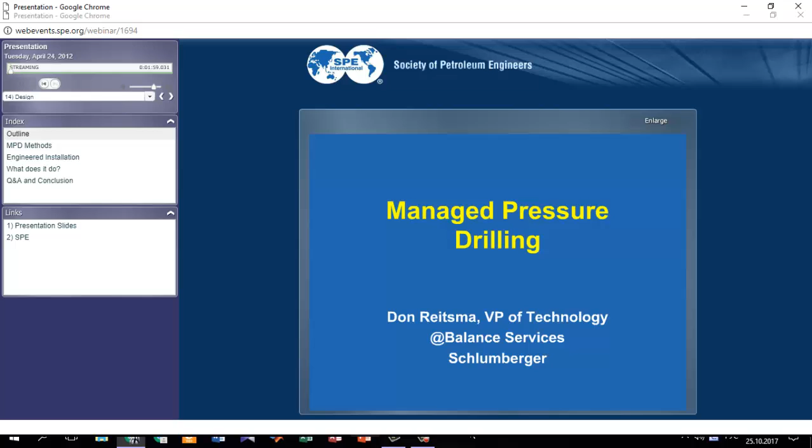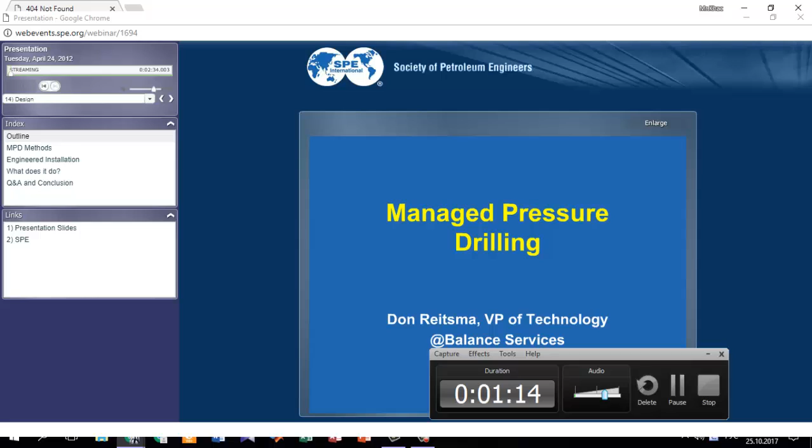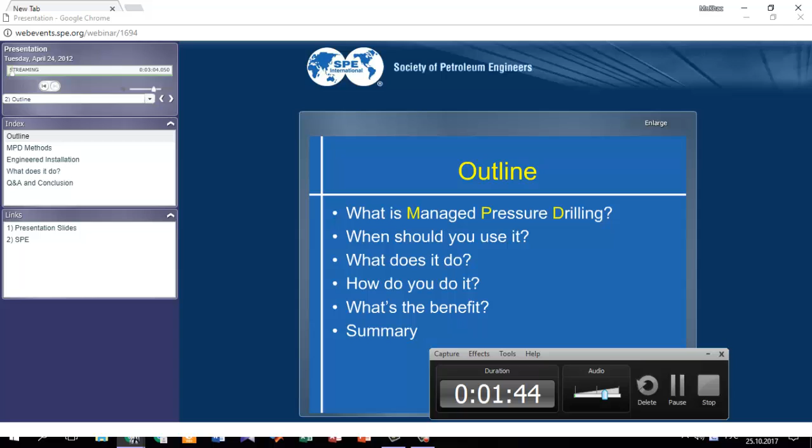Mr. Reitsma holds numerous patents, and has written and co-written various IADC articles on the subject of managed pressure drilling. So I'm just going to start with the definition. This definition was developed some years ago after several years of actual discussion about it. But what we came up with was to say...

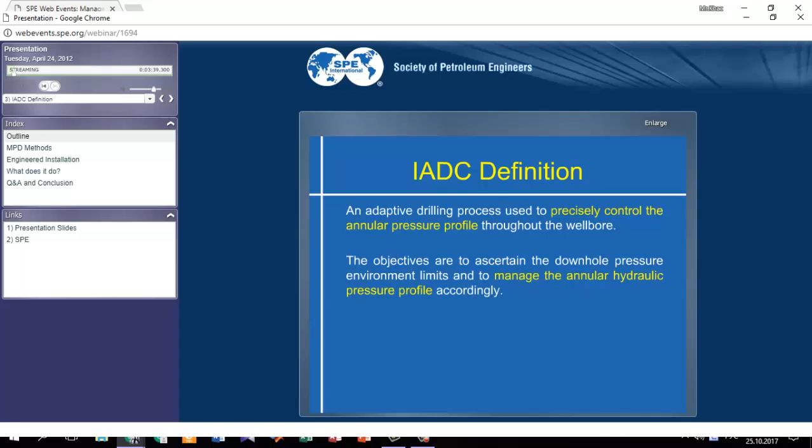Also, what's the benefit? You know, what we want to do with MPD is avoid a continuous influx. It's really an overbalanced drilling technique. And the reason we came up with that was because underbalanced drilling, or UBD, was already out there, and there were really, to be honest, some people that just didn't want underbalanced drilling on their rigs or in their region. And we wanted to make the distinction that managed pressure drilling wasn't there to have this continuous influx throughout the well, you know, like underbalanced drilling.

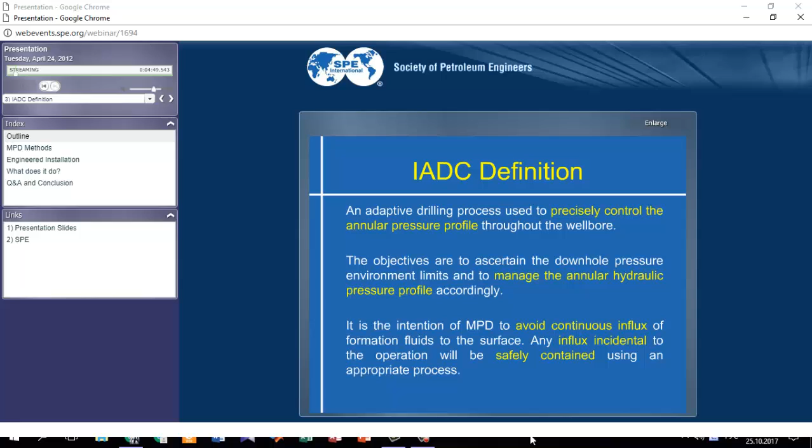What we want to do with MPD is avoid a continuous influx—it's really an overbalanced drilling technique. The reason we came up with that was because underbalanced drilling was already out there, and some people just didn't want underbalanced drilling on their rigs because we run into problems such as losses. We wanted to make the distinction that managed pressure drilling wasn't there to have this continuous influx like underbalanced drilling.

So if there is an influx, it could be planned if you're trying to fingerprint your well. You may be able to just change the pressure, figure out what these environmental limits are, but you're going to contain it—we want to make sure we're getting to target. It says economically unattainable prospects, but really what we're looking at is efficiency. We may be able to get to TD with conventional drilling, however adding MPD techniques may make it more economic and easier.

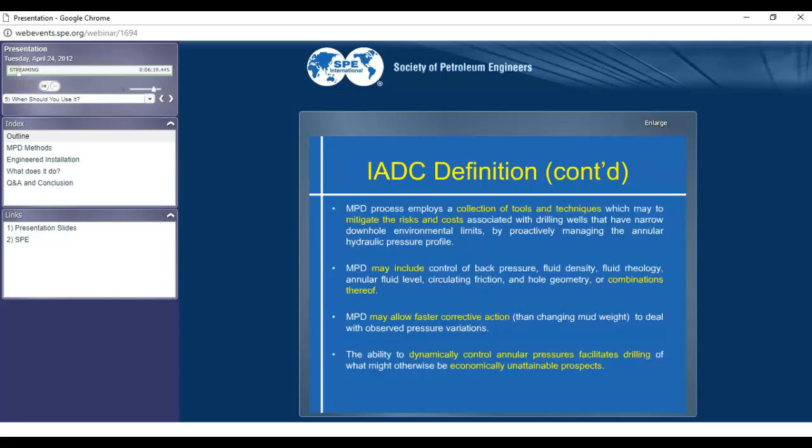So when should we use it? It's really when conventional drilling is not getting us to where we want to be—are we going over AFE because of drilling problems, losses, kicks, a lot of non-productive time? We just want to come up with a tool that we can exploit the asset at the lowest risked cost.

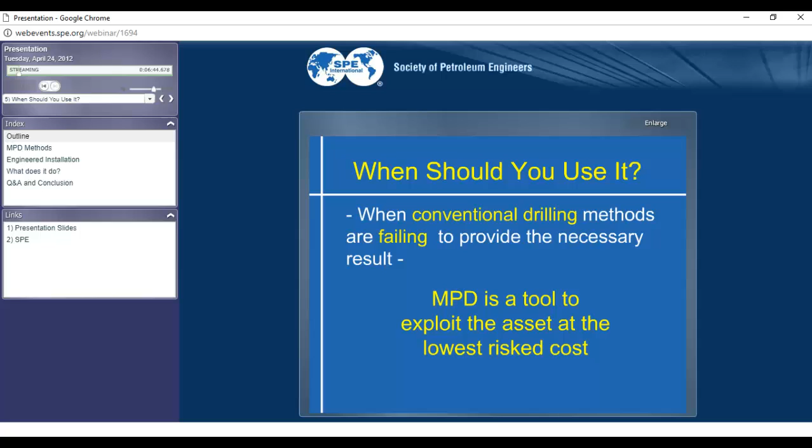So what are these problems that we're going to run into, this NPT? As I mentioned, kicks, losses, borehole instability, and that's going to be characterized by having to back ream quite a lot, essentially fighting your way to bottom, maybe cuttings loading and collapsing, that sort of thing.

Breathing and ballooning, which we see in high HPHT wells. Nuisance gas, which is a little bit different and might suggest more of an underbalanced drilling technique. And stuck pipe, which could be borehole instability or differential sticking, and then low rate of penetration, which can be helped in some cases with managed pressure drilling.

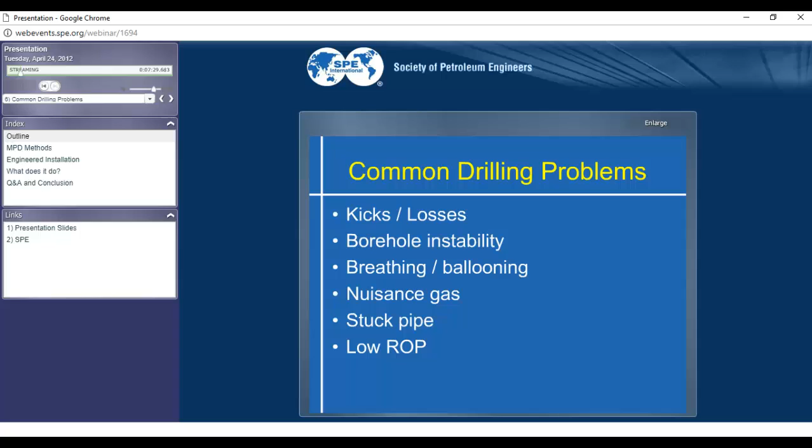So how does it happen? First of all, drilling through depleted reservoirs typically causes borehole instability and a reduced fracture gradient, so you end up with a smaller pressure window—I'll get into that a bit more. Drilling into fractured reservoirs, if you've ever drilled into a karstified carbonate system or a massive vugular system with fractures, you get total losses and then it turns around and kicks you.

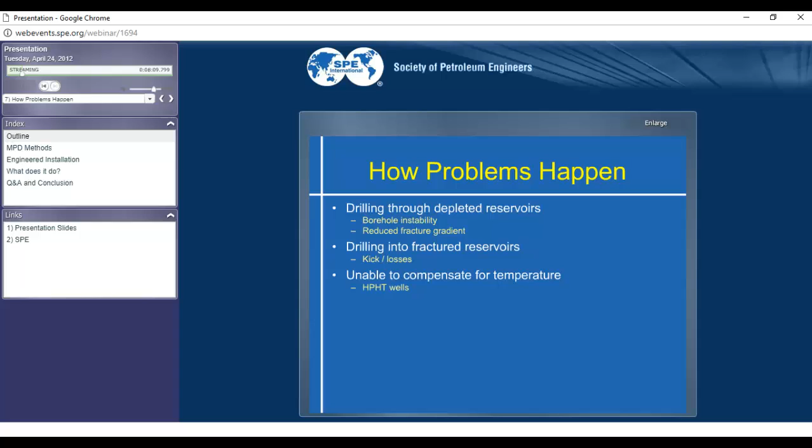This is another one we've always had a problem with—HPHT wells, and how to compensate for the temperature changes in the well, particularly when we're tripping, and how those mud properties have an opportunity to change because of the increase and decrease in temperature in a particular part of the borehole. So how are we going to manage that?

And surge swab—a lot of re-entry drilling is done with very high friction factors in the well, and when you start moving that drill pipe, of course, you'll get increased pressure from surge swab.

Exploration wells—do you really know what you're drilling into? Basin models can have greater than 5 pounds per gallon error, for example. We've got one where we just drilled in and it was over 2 pounds per gallon off, with total losses, and we had to correct for that.

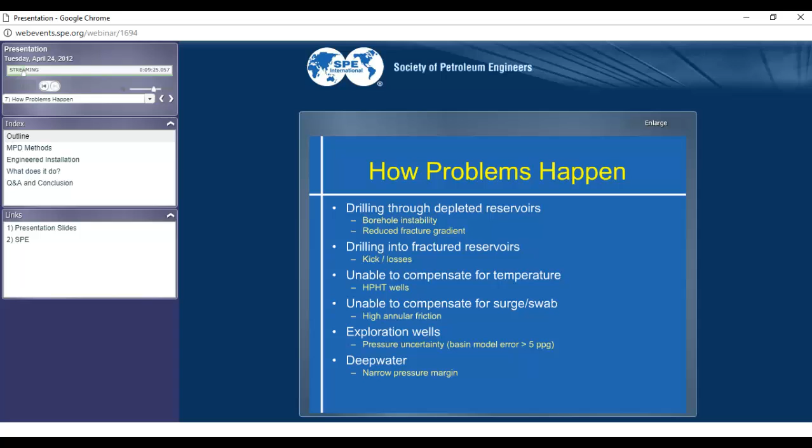And deep water, narrow pressure margins, if you've seen that. That's something that's just beginning to be seriously looked at in terms of providing solutions, and it's going to be very important to ensure we obtain those reserves.

So these problems are costly. Definitely, if you've gone twice over AFE in some cases—your expendable cost is going to be a lower cost type of thing, your spread cost is going to be a higher price, but the greatest cost is that lost objective that the oil company was trying to obtain. If you lose those resources, you just don't have that money anymore. So what we really want is the lowest dollar for recoverable barrel of oil equivalent, and we're going to reduce those dollars by controlling the drilling costs and increase those dollars by being able to produce those reserves. And that's very real.

What I'm talking about here is really drilling the undrillable wells that we can't get at with conventional drilling.

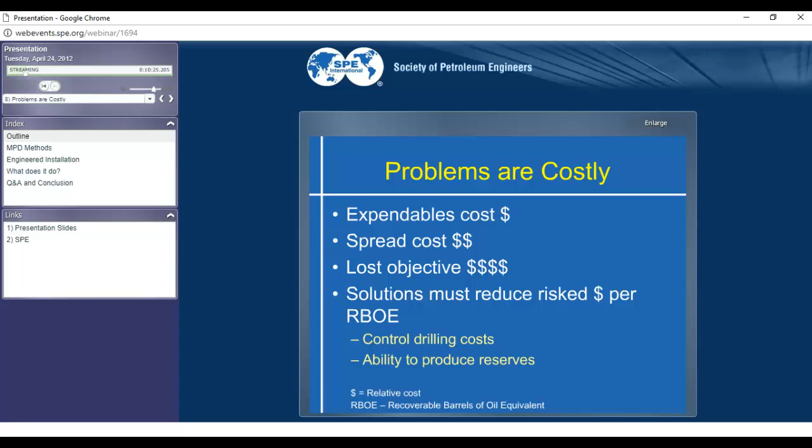So what I'm showing you in this diagram is this red line of pore pressure, or borehole stability, and this other red line being the yield or fracture pressure. This is the typical narrow window we run into, and what happens is when the drilling rig turns their pumps on, the frictional pressure increases and we perhaps exceed the yield pressure, and we start getting losses. People will look at this and say, well, we're getting losses, let's pump LCM, let's pump borehole strengthening materials, and those may help to a degree, they may even solve the problem.

But what if they don't? What's the next tool in the toolbox that we're looking at here? Let's try and maybe control this pressure a little bit better.

When pumps are off, for example, we lose that frictional pressure, and because maybe we've dropped the mud weight a little bit to try and cure our losses, as another method of doing that, we may find ourselves below pore pressure. Maybe not a lot below pore pressure, maybe just a little bit of gas coming in, but enough to make it somewhat of a kick, perhaps, or nuisance gas, and it's not something that's controllable.

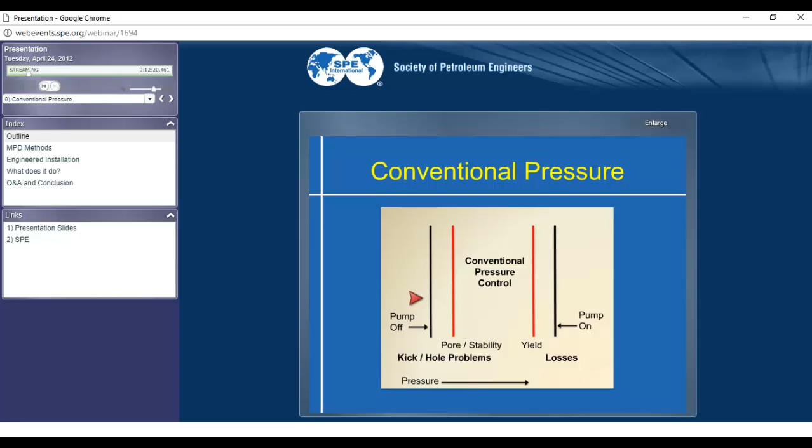So with managed pressure drilling, what we want to do is really control that, work within the environmental limits. Perhaps we've established what those are by a leak-off test and what we call fingerprinting, by maybe reducing the pressure and taking a slight influx to find out where our pore pressure is. And by some way of manipulating the pressure, we are going to maintain the pumps on and pumps off pressure within this window.

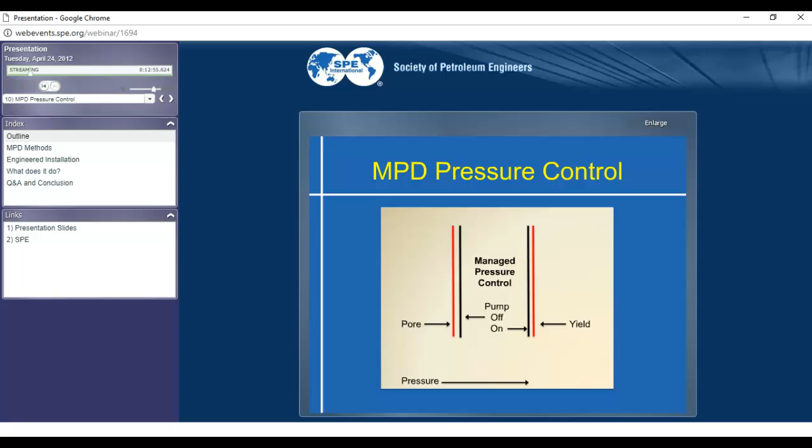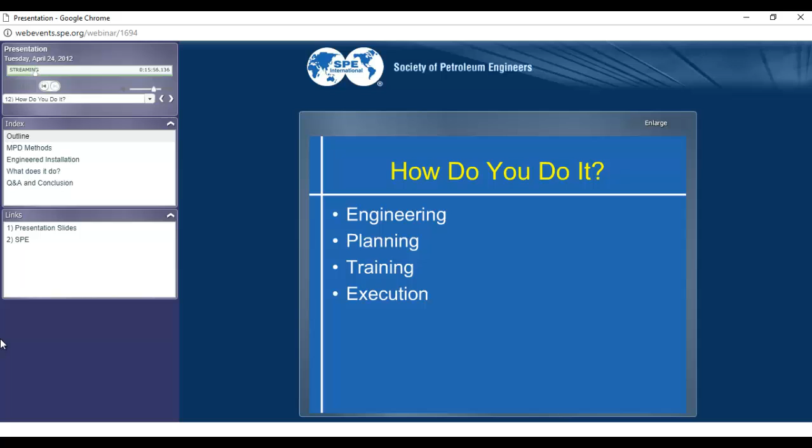So in engineering, let's take a look. Let's just see if managed pressure drilling is a tool that can be used to drill that well better.

We're going to have the hydraulics program, so we're going to plan on what mud weight we're going to use, what pressures we're going to use, how that's going to affect the pressures all along the annular pressure, the pressure profile, which is very important, and I'll give you some examples of that.

And then tripping is probably the most important thing we need to look at. Drilling is essentially easy in terms of maintaining pressure and having pumps on and pumps off. But how do we get that drill string out of the hole? Are we going to pump pills or use a different weight of mud? How fast are we going to pull? Are we going to pump out of the hole, or are we going to go on elevators?

Obviously, if we can get out on elevators along a hole section, it's going to be much faster, much more efficient. But it may be necessary to pump out of the hole. You just have to run these hydraulics to see really what you're going to do.

And then running casing and liners, you end up with higher surge swab pressures, that sort of thing. So how are you going to get the casing in the hole? And finally, how are you going to cement this well? Don't start pumping cement and then get total losses, for example. So really planning from drilling out of the shoe to landing and cementing, and casing or your liner, if that's the case. So we really need to look at the whole thing.

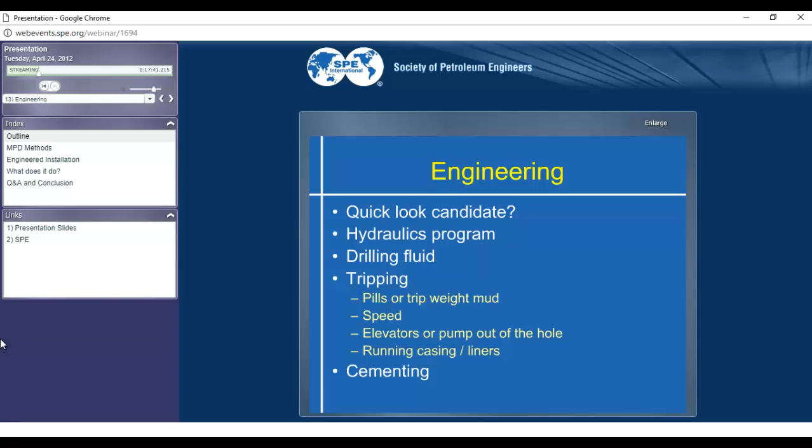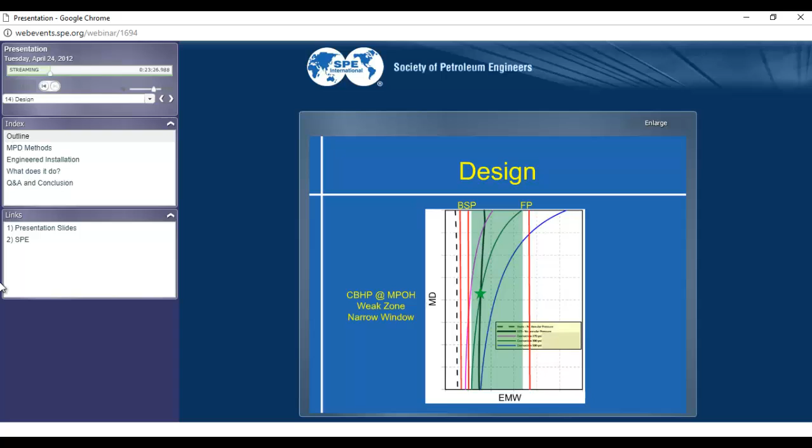So that's where we have to do the work, but we also have to do a lot of work with the planning, with the site survey. It depends on the equipment, the location, the stack height, because you need a rotating control head if you're using back pressure, for example. These things all need to be considered, and it depends on the type of installation. But really, you want to do a site survey first, where you're going to put things, how you're going to hook them up. The HAZID HAZOP—it's a new technique.

There are new hazards, new methods that have to be done. It should be included into the drill-the-well-on-paper program, that sort of thing. How are you going to manage well control now? How are you going to do kick detection? Those are all very important considerations as well, and how long they take really depends on your HSE program, the complexity of the well, the experience of the personnel, that sort of thing.

Some of the more detailed cases, you can do several HAZOP reviews as well, so you'll figure out the best way to deliver the product. And of course, mobilization—how long does it take for equipment to get to New Zealand, for example?

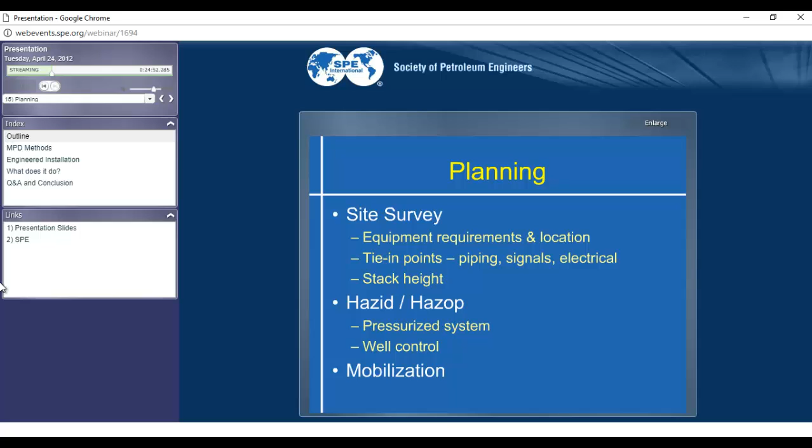Training, again, very important. Office people, basics of MPD at a minimum. If the engineers are designing it, they have to know what they're talking about. Rig operations really have to know what's going on—what if that rotating head begins to leak?

What am I going to do? What kind of pressures are we looking at? How am I going to communicate with the MPD provider? That sort of thing. And for those not directly involved but who like to listen to the morning calls, a general understanding is probably fine—they know what you're talking about.

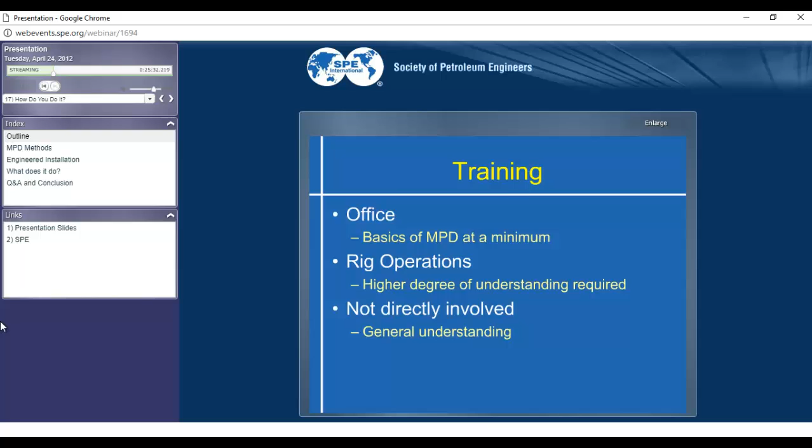So how do we do all this? I've given you a couple of clues, maybe with back pressure control, that sort of thing. But it's really going to come down to where you're going to do it. There are four main ways: annular friction, surface pressure, density control, and what we call delta energy, and I'll talk about that. Now over on the left here, where I say annular friction, that's really the equivalent circulating density control only—you only have control over the friction in the well by using this technique.

It's a different method, but it will only give you control over the friction pressure in the well. Geometry, you're going to design to reduce your friction as much as you can—with the casing, drill string, hole openers, a lot of that being done.

Pump rate, you're going to consider it, but I wouldn't recommend starting to change pump rate because cuttings are loading. You want to reduce ECD—you're going to just drill yourself into a problem.

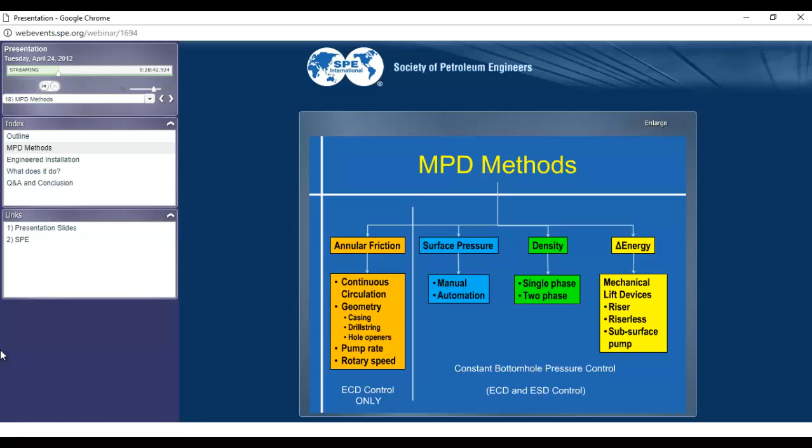Subsurface pumps are coming in, and that was presented at the dual gradient seminar we had in Milan a few weeks ago, which was very well attended with a lot of good information there. So if you can get more information on that, it'd be very helpful—I can point you in that direction too.

So I'm just going to talk about surface pressure. Really, we don't have the time to go into every method we can think of for managed pressure drilling, and I think the number of methods being developed is increasing by the day almost—it's really just coming up with more creative ways to get our wells drilled cheaper.

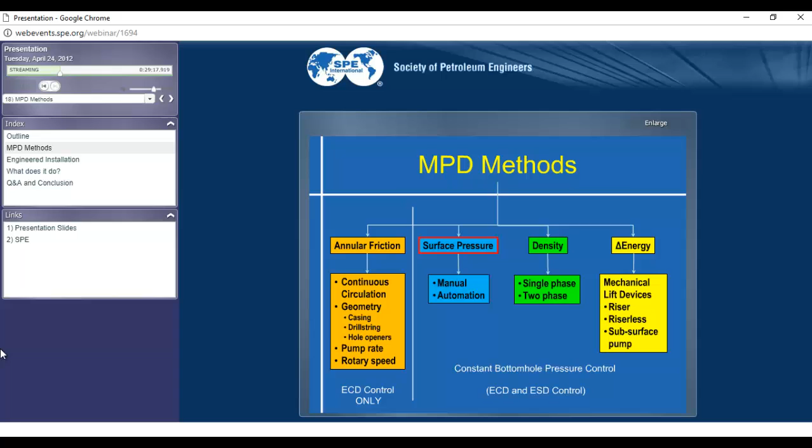But what we're getting developed is this IADC selection guide. This is only in draft form, and we're still working on it a little bit. What we're going to be interested in here is what well location—we're really just trying to provide a simple guide to start you off with, and some of the tools you may consider for managed pressure drilling.

And I think today what we've got is too many tools being selected by this guide. But in any case, we're still working on it a little bit. Hopefully in a few minutes you can get an idea of whether it's going to work for you and what could work for you. So we're going to look at what your well location looks like, the type of rig.

The drilling fluids in use, what the pressure profile is. Really, what are your goals or concerns—are there losses, kicks, that sort of thing. And we've got just an example of the narrow pore pressure here, frac gradient margin.

And then what it comes up with—I won't go through all the colors and everything—is the different techniques that are available. And if you just briefly look down this list, you can see quite a number of different techniques that can be used, and they come under the managed pressure drilling umbrella.

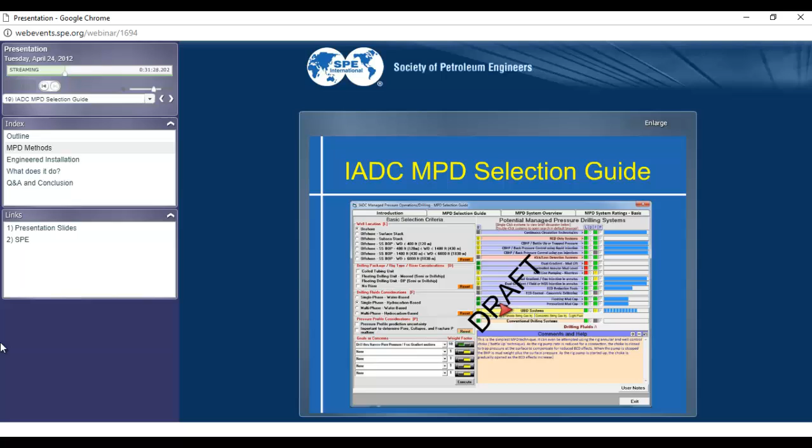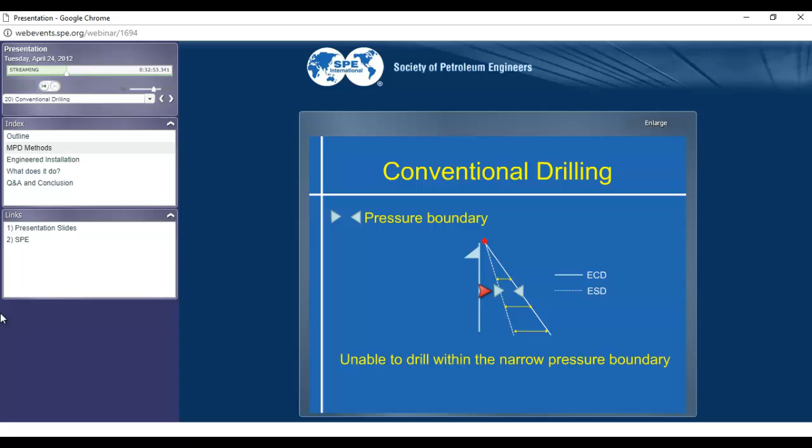If I've arbitrarily put in the pressure boundary I need to get through, this narrow pore pressure frac gradient boundary, for example, or borehole stability boundary, which may be because I need to drill through a depleted reservoir to get to a deeper horizon, I can't do it because I'm outside that boundary now. So I need a different way of getting through, and this is becoming more and more common. This is a real brownfield type application where we're in an existing field drilling deeper to a new target.

Continuous circulation, just one slide briefly on this. How I'm saying we've got ECD control is on the left here. What we've done is maybe reduced the mud weight a little bit, and we'd be taking a kick, or we're keeping the same mud weight. But this line here, our dynamic pressure with pumps on, is always going to be designed to drill through that window. So that's no problem, we've got that.

Now, on the right here, what we have to consider is that once we're at TD, and let's say the bit is right there, we've got circulation occurring above the bit, obviously. But below the bit, we've got the static gradient of that mud, so we're parallel to this dotted line. We have to make sure that when we're pulling out of the hole, we still maintain this pressure in this window. We couldn't pull all the way out of the hole without doing anything, because we'd lose all our friction and be back to this point, taking a kick.

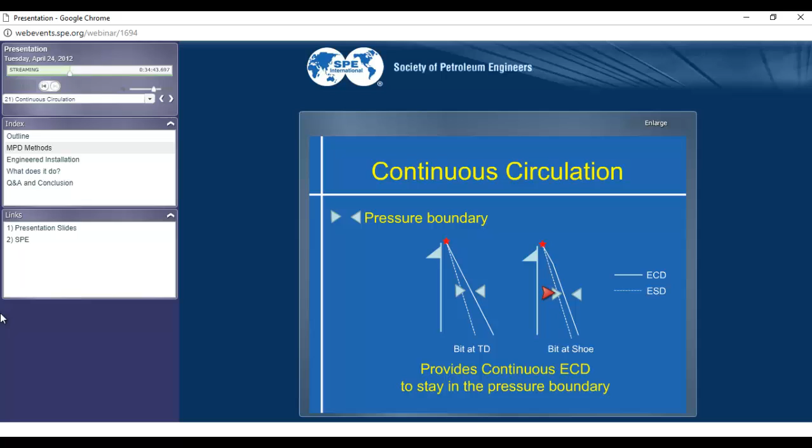So what we're going to plan on is maybe pumping a pill to impart more pressure to increase the static density without circulation. So that's the engineering plan, but this is just to show you what you'd have to consider with continuous circulation, because you only have circulation to work with and the control of the friction.

So going on to back pressure control, it's really the most common method used today, onshore and offshore. It's scalable. People are using it in manual control, as a backup in case they need it, or it's planned, so they're going to use it, that sort of thing. There's a real plethora of ways to apply back pressure in order to do that, and I'll talk about that a little bit.

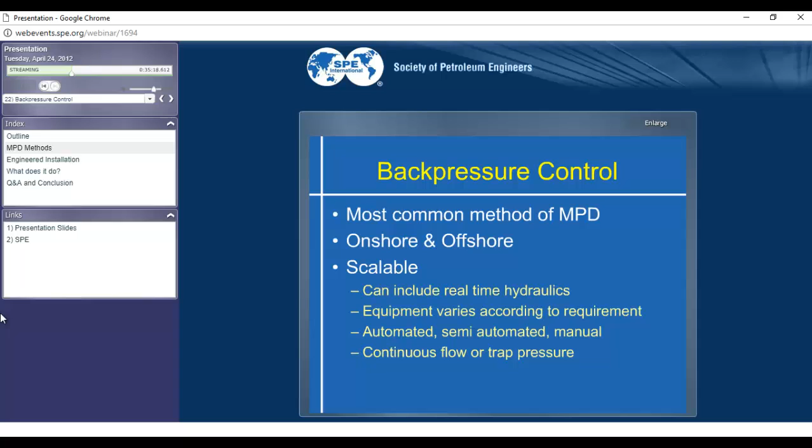But what does back pressure control do? Again, trying to build on from those cartoons I showed you earlier. If we wanted to maintain constant bottom hole pressure at the total depth of the well, and we planned for a static density with back pressure of some value, which is going to be above the continuous pressure when we're pumping, continuous flow, we can find that we can get through that pressure window in that way. So that's another way of getting us to TD and staying in the pressure boundary.

And rather than calling this constant bottom hole pressure, what I think we should really call it is inverted pressure drilling, because instead of having constant bottom hole pressure at the surface with conventional drilling, I've now just turned it upside down, and I've got constant bottom hole pressure at TD. And why does that work? Mainly because I have less friction in the open hole section, and I'm compensating for all that friction from the shoe right to surface.

So a little bit of a math exercise there, but it works very well.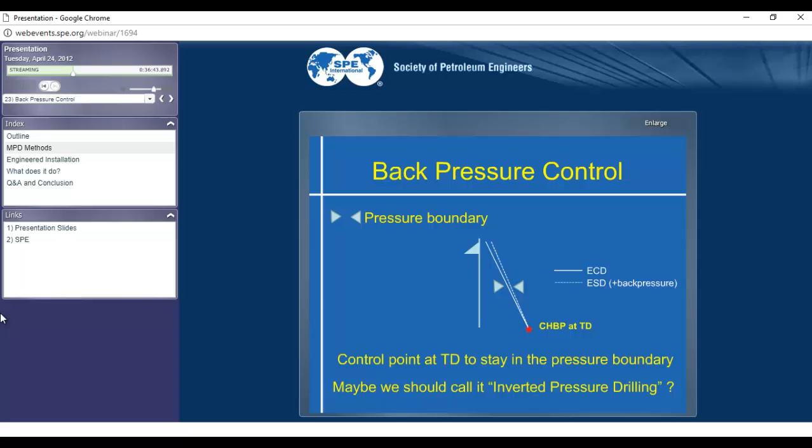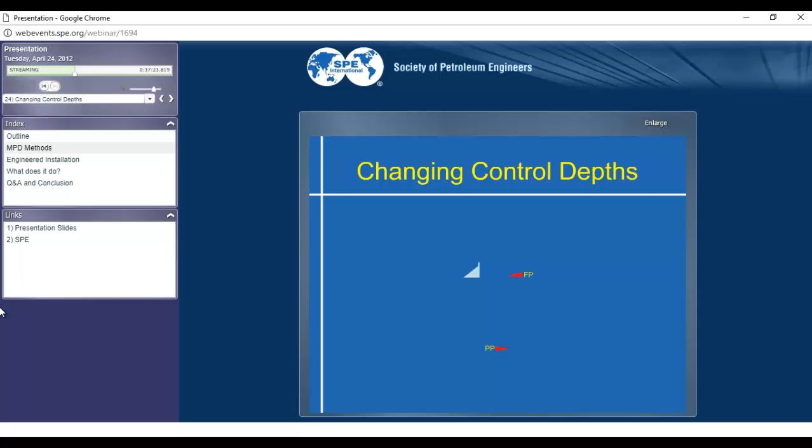So I've managed to get my shoe down, and maybe my fracture pressure, my weakest point, is at the shoe. I hope not, but it ends up that maybe it is. Maybe I've landed the shoe too high, and it's not like that hasn't happened before. So, gosh, now I've landed the shoe too high. I've got a weak shoe. What am I going to do here?

So I'm going to hold constant bottom hole pressure at the shoe, and I'm going to drill down. That little red star here shows where I'm going to hold this pressure constant. Here's my static density and my equivalent circulating density. I turn the pumps on, and when I turn the pumps off, I'm holding pressure constant here. What I'm going to do is a little exercise: wherever my bit is at, that's where I want to hold the pressure constant. Let's see if that actually works. Imagine that red star being the bit.

So I'm going to drill ahead, and I'm still okay. I haven't actually drilled yet. This is my hole here, and I'm not down to pore pressure yet. So I'm okay so far. I'm staying away from fracture pressure. I've got a pretty big window there.

I'm okay, I'm going to just keep drilling down, and now I'm at the midpoint of the open hole, and things are going really good, and I'm getting closer to my fracture pressure now with my back pressure. So I'm just going to keep drilling ahead.

And I've now gotten to TD, and it looks like I could be hitting my fracture pressure with my back pressure. If you remember from the hydraulic model I showed you, with constant bottom hole pressure at TD, where you've got this curve—I'm not showing you the curved line—the pressure is going to increase at surface. Why? Because we're compensating for the friction in the open hole in order to keep these values constant. So this pressure is going to go up as I'm doing that.

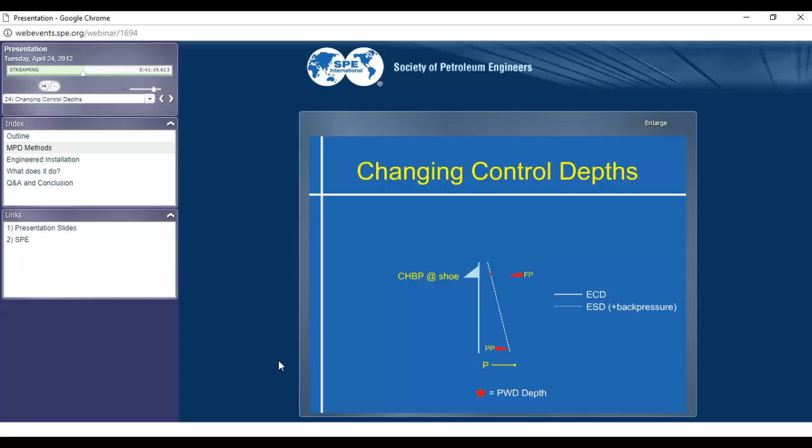So what I end up with is a potential pressure window that I can drill in with surface pressure. These dotted lines here are going to be my back pressure, when the pumps are off. And this white line is what the pressure profile looks like when the pumps are on. So I can manipulate the pressure anywhere in this window by changing the back pressure, and I just have to figure out where I want to do that.

So do I want to move the line here, or here? This line is somewhere in between this line and this line, to stay within that window. So this is the potential pressure window that I have, and I'm just going to figure out the best place to be in it. Really, I want to stay away from fracture pressure and pore pressure or borehole stability problems, and manipulate that pressure.

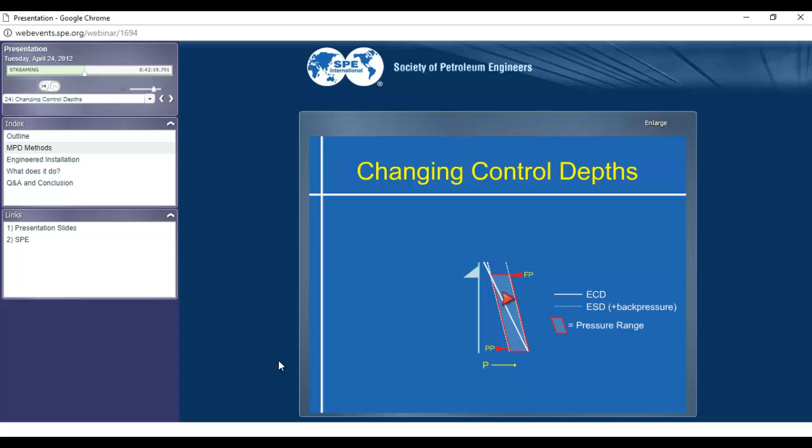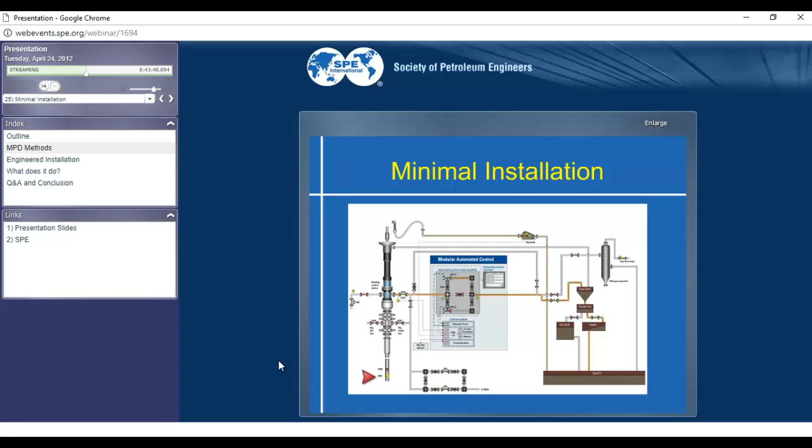So essentially, that's what we're looking at there. This is an example of a simple installation where we just have a choke manifold, and you can see some control lines here and a hydraulic line, and we've got this connected to a control system. We're using 3-inch hydraulically actuated chokes, which is kind of the stalwart of back pressure control.

This is where these nuisance gas applications come in, and essentially they're a low volume, high pressure situation where you'll temporarily go to an underbalanced situation, but you'll essentially bleed that gas off in a well control event type of manner, and then continue to drill ahead without having to weight up, because you'll deplete the reservoir.

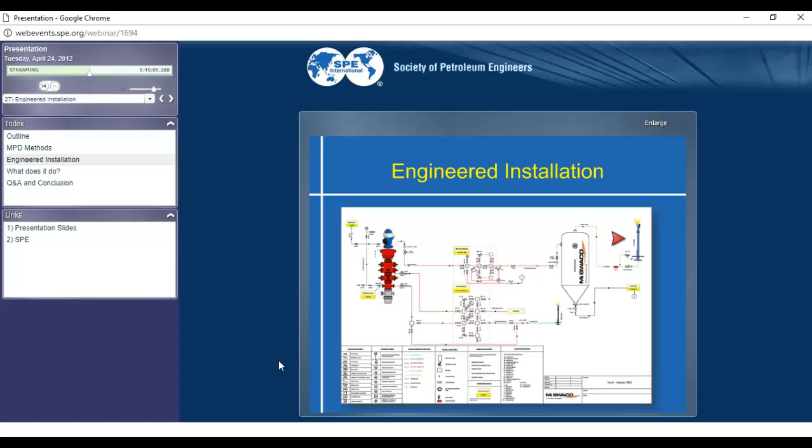So this is another type of manifold setup using auto chokes here, and then a third choke's been put on the E-choke. So these auto chokes might be a lower pressure control, and the E-choke might be a higher pressure control. So there are numerous ways of designing these systems.

A full-scale installation has a lot more parts and pieces added on, but essentially, if a back pressure pump is being used, it may aid in more precisely controlling the pressure, but it adds to the piping, and you need strainers, that sort of thing.

As well, if you're not using a kick detection system already, add in a Coriolis flow meter, which then gives you a really high fidelity kick detection method, probably down around 15 gallons a minute in order to detect, depending on the flow rate—it's a percentage of the flow that the users are going to be able to pick up. So it's more piping and more equipment, so obviously more complexity involved.

In a lot of applications, this is the standard method of doing managed pressure drilling, but for some of the North America land applications, where it's more of a contingency or a known requirement, and you can trap pressure, for example, you just wouldn't go ahead and use that.

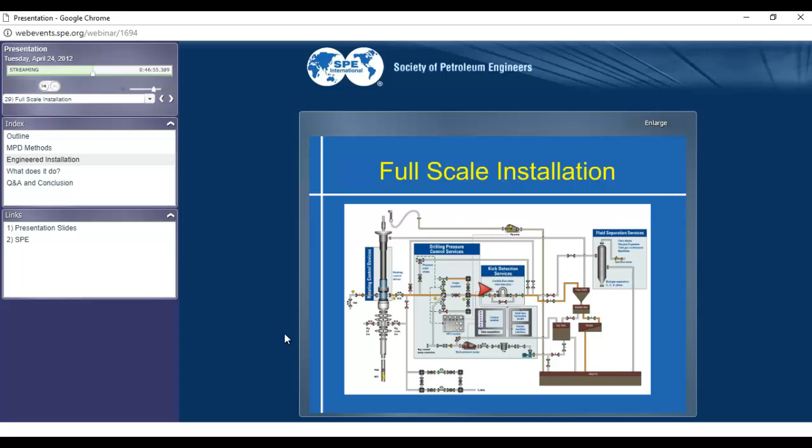This is another offshore situation. You see the Coriolis flow meter here, and in this application as well, there are two back pressure pumps, and the client just felt that they wanted the contingency of a backup pump, and that's fine. This is what you're going to see when you go through your HAZOP, for example.

Here's a land application over here where we've got twin hydraulic power units. This is a modular system. That's the PLC panel, that's the pump, that's the choke manifold. On the integrated system, it's got the PLC, the hydraulic power unit, and the choke manifold all on the one skid.

So different applications, different methods depending on that application. I'm just going to roll into a little more detail on choke control automation and then wrap things up.

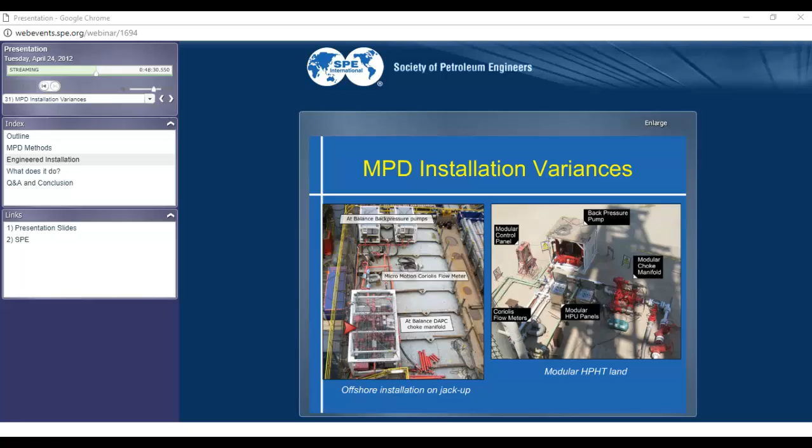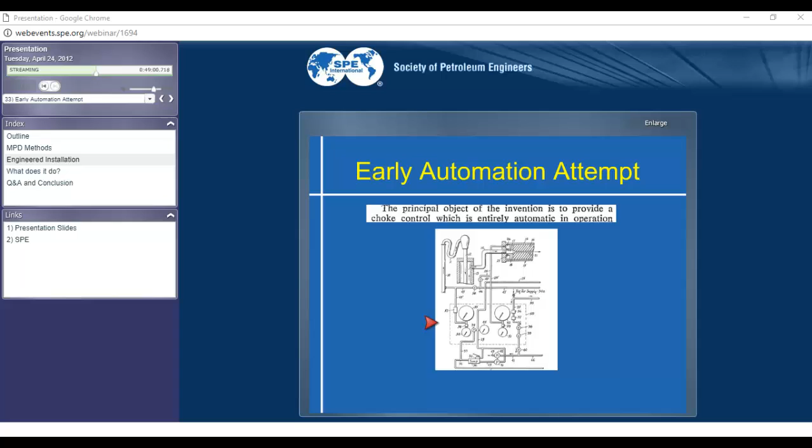Here's an early automation attempt at controlling a choke, I think this goes back to 1967. He wanted an entirely automatic operation of that choke, and here's how you're going to do it. Don't ask me to explain it, I'd have to go through it. But it looks a bit complicated to me, and although that was the state of the art at the time, it just didn't work, and was likely unstable, unreliable, couldn't be operated. People said, I can do it by hand better, and that's what they did.

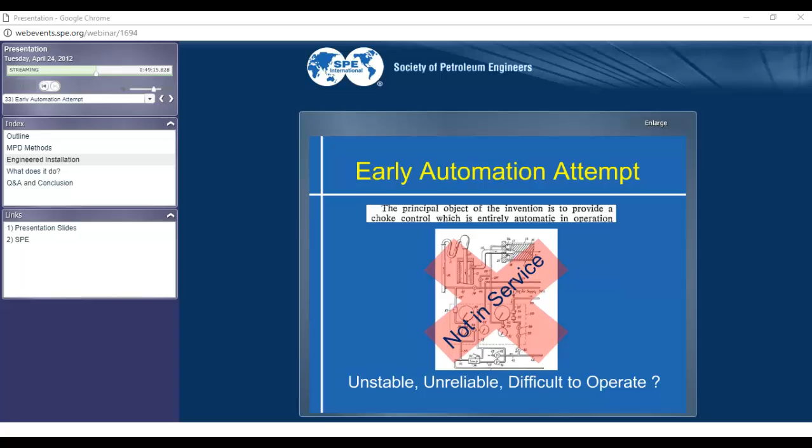But the reason they wanted that automation was because they want it repeatable. What we have today is what are called PI control blocks, or proportional integral blocks, a typical control system method. Some manual tuning is required to get the right numbers into this PI control block. What happens then, though, is if the compressibility of the well changes, you need to go back to square one and do your manual tuning again.

These aren't the most stable systems in the world, so rapid large changes in pump rate or pressure requirements can make the system unstable. So typically we're very controlled in how things are done on the rig. At times, though, things happen without planning - pumps stop, power failures, that sort of thing. So the system has to compensate for that, and sometimes what they do is they go back to manual control, and we're trying to get away from that.

The chokes have this sweet spot of 20 to 80%, or 30 to 70%, where they operate very well. If you move the choke, you get a pressure response. But below those numbers or above those numbers, if you move the choke, you may not get a lot of pressure response, so you have to move it a lot, and that makes it really difficult to control. As luck would have it, a lot of jobs we're on were below the 30% range, so it's difficult to control these chokes manually.

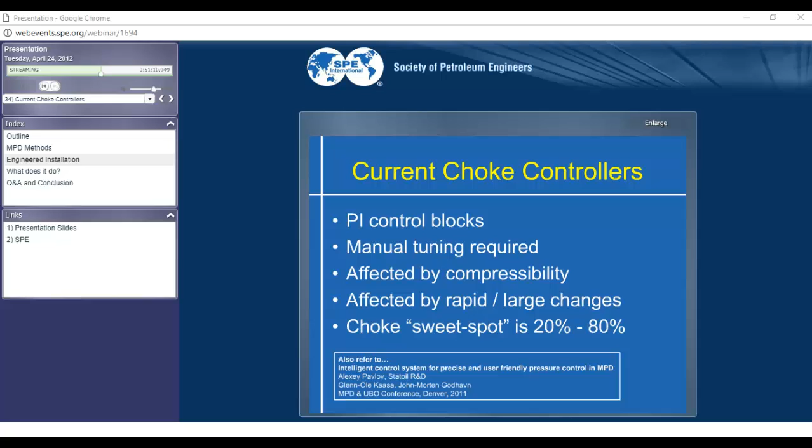So with a new choke controller, we want it to be compatible, have no tuning requirements, so people don't have to know how to work it. They just have to know how to put a pressure signal to it, either manually or whatever, and the choke will do what it wants. So it has to operate across the full range of the choke. Why? Because we want it stable, and stable because we don't know what's going to happen, whether it's low flow or people changing pump rates or different fluids going through the choke or compressibility changes.

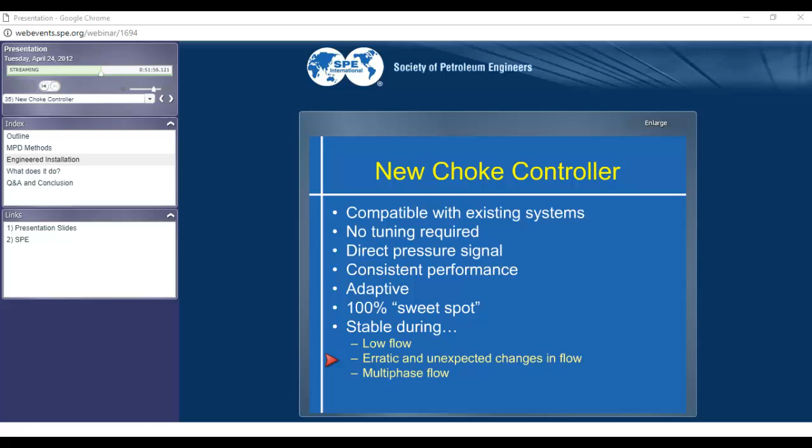So this is where we're looking at now. It would just be install it, go through the calibration routine, give it the pressure you need, and drill ahead. And really, that's what people that are really good with manual control of chokes do.

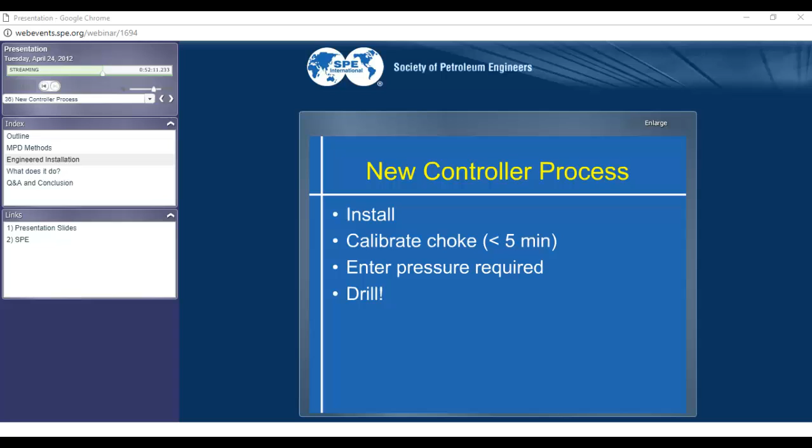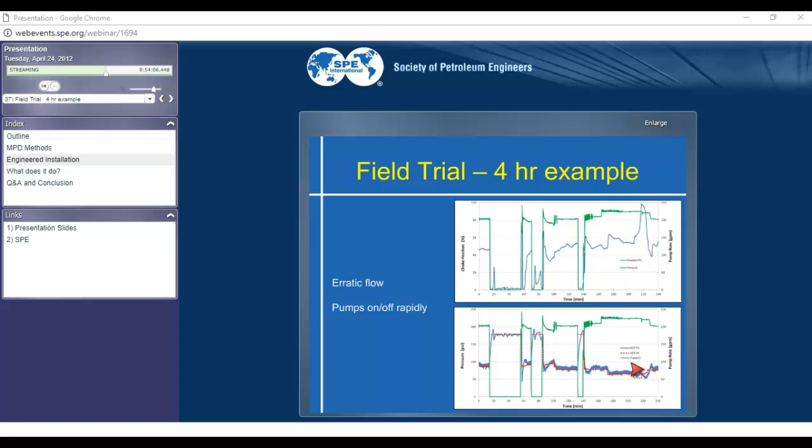And that's really what you want to do. You just want this choke to keep doing whatever you've told it to do, based on what's going on with the pumps and maybe the pipe movement, that sort of thing. Anything that's really going to change the equivalent circulating density or the static density.

So here's just a close-up of that first pumps-off situation that I showed you. That was the choke overshooting in order to control this pressure down here. But you see this pressure being controlled here is like something like 5 psi, and if you see the choke position, that's just barely open, and the choke is actually stabilizing here.

So the well is flowing. This is actually underbalanced drilling because the well is flowing for some reason, or it's maybe not underbalanced. It may be because you're injecting nitrogen, something like that. But we're getting some flow through the choke, and it's keeping the choke open 3 or 4%. And that's a good thing, because remember I told you the bad area is less than 20 or less than 30. And what we see is the choke is actually being able to control there.

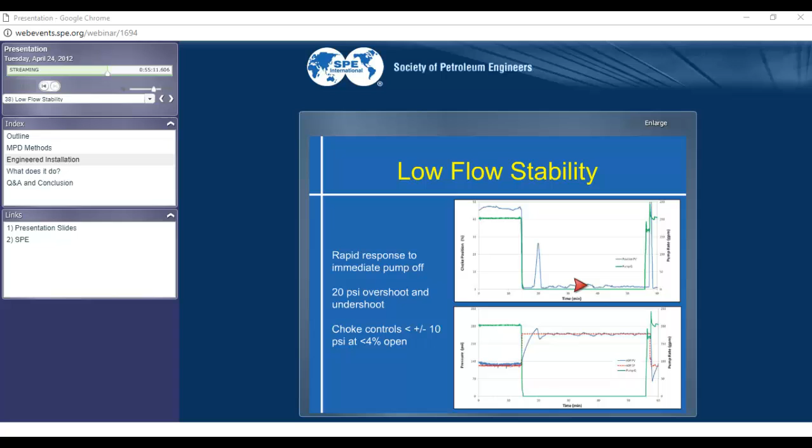Here's where we're flowing at a constant flow rate, and we're just making minor changes. And this choke is actually opening here for some reason. You see it's increasing. And that's, I think, because this one we're looking at nitrogen coming around, so there's a little more flow coming out of the well. But the choke opens to maintain this constant pressure down here.

So that's just doing that automatically. And if you can imagine somebody manually having to do this 24/7, it can get a bit bothersome, and they're likely going to miss a few events. So it'd just be nice to have a choke do this all the time.

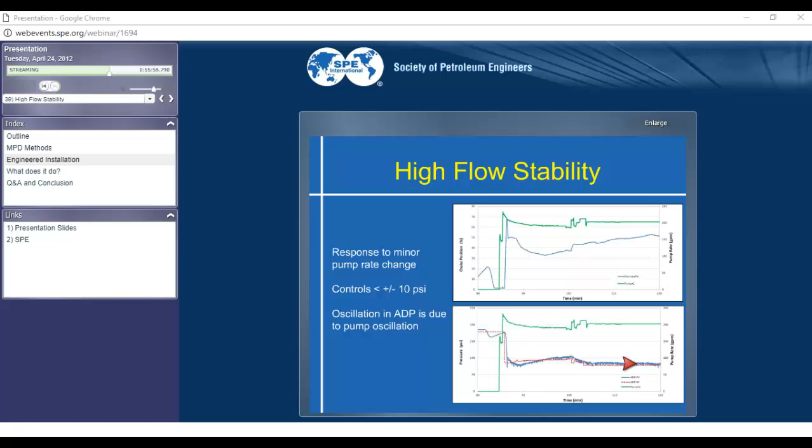So what's the overall benefit? Not of the choke, but the overall benefit of managed pressure drilling. And really, here's some of the benefit here.

Here what we've got is the green line and the red line agreeing very closely. This is just a back pressure pump. And here what we have is a green line and the red line agreeing very closely again, maybe a little bit of losses, but certainly improved by the fifth connection. So what we had to do was determine what were the best back pressure numbers to use to reduce the breathing and ballooning.

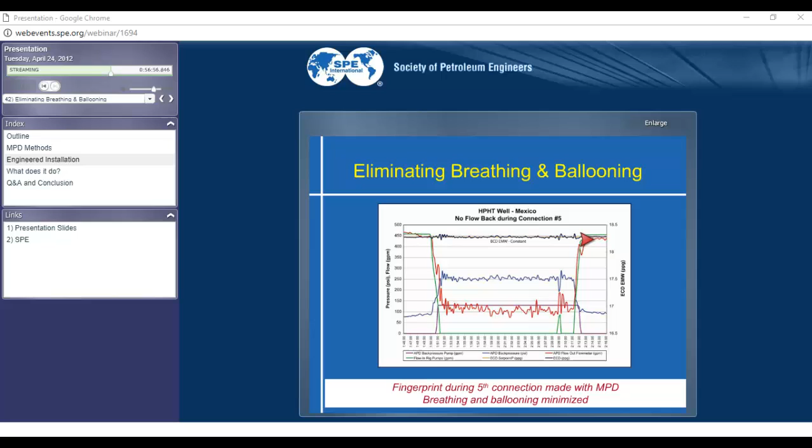Here's where we've got non-productive time because of saltwater influxes. So a high pressure saltwater zone flips the oil-based mud. So we really designed the system to not allow this influx of salt water, maintaining a higher back pressure at that point. And you can see the hours involved here can be very costly. So what we did is we eliminated that.

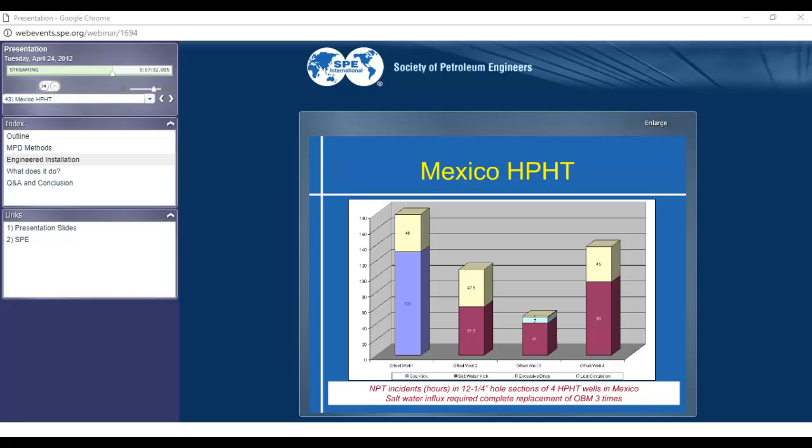In the Gulf of Mexico, this is Shell's experience with some 24 wells, really being unable to drill these targets because of these narrow pore pressure, fracture and borehole stability windows, and having to drill through previously depleted sections into new reservoir, and it just wasn't possible to do this conventionally. So these would have been a pretty good chance of being stranded reserves had we not had this technology. So you can just imagine for a moment leaving behind millions of barrels of oil and the cost to the company for that.

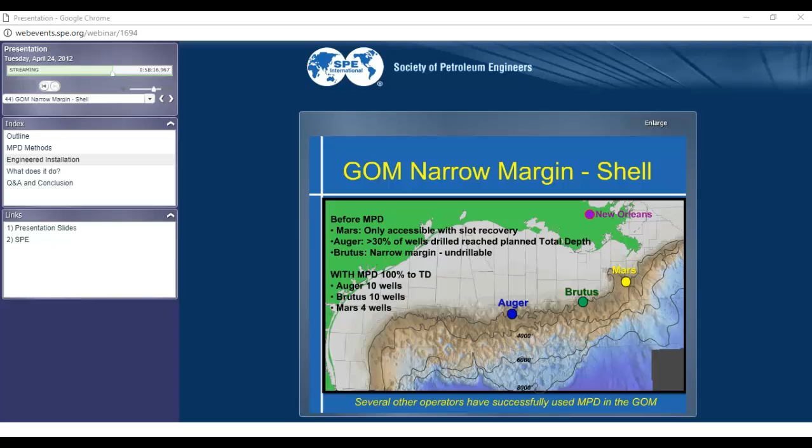Big time in South America and Brazil, and in Asia, we're very active as well with the different methods. So it's growing all the time as far as where these applications are going and what we're doing with them. Of course, deep water, Gulf of Mexico, that'll be starting, I'm sure, in the next couple of years with these subsea mud lift systems.

So in summary, just use it where you're not getting a good conventional drilling solution. That's my message here. There are other tools out there rather than just pumps on, pumps off, messing with mud weight. You can work out the economics and the method and go for it. It's really, stop beating your head against the wall here. These are proven technologies now.

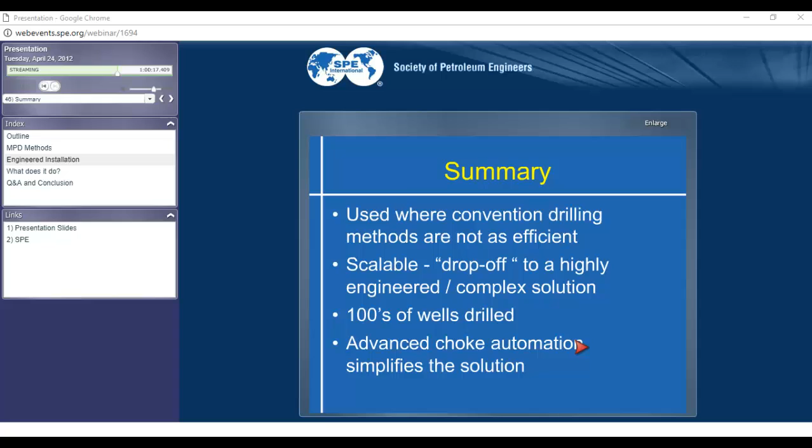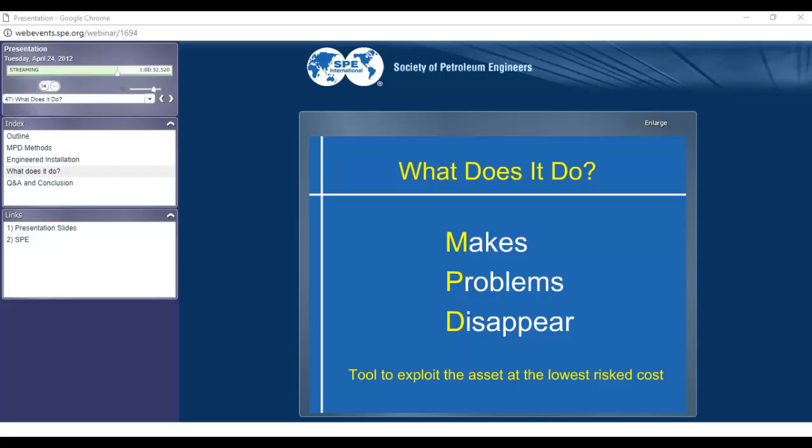So really, what does it do? Ken Smith coined this a few years back: it makes problems disappear if you do it right, and you just want to use it and get the oil out at the lowest risked cost. So with that, I've used up my time, and I'll thank you for your time and listening, and I'll take any questions you have.

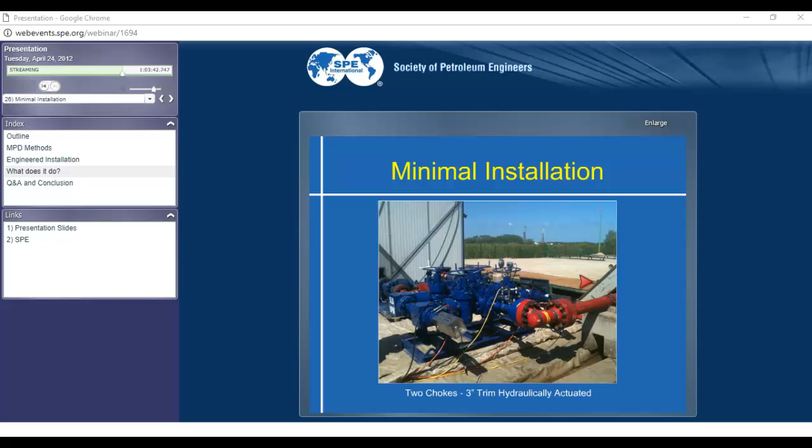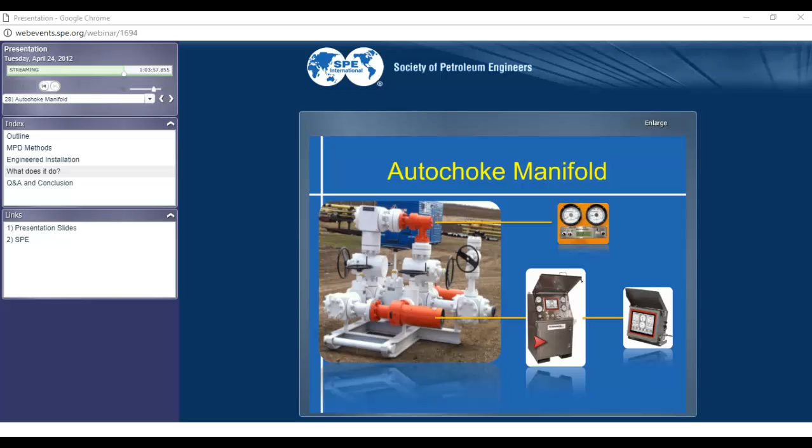And if I go to this slide, this small panel for the basic system is going to sit on the rig floor. For the larger system, we're going to see this type of layout for the equipment. Now, personnel can be either—maybe if this was a mudlogger shack or something like that, we might be in there. We might have our own 10-foot container, or we might be in with the driller, which we're doing on a job right now. So, does that answer that question?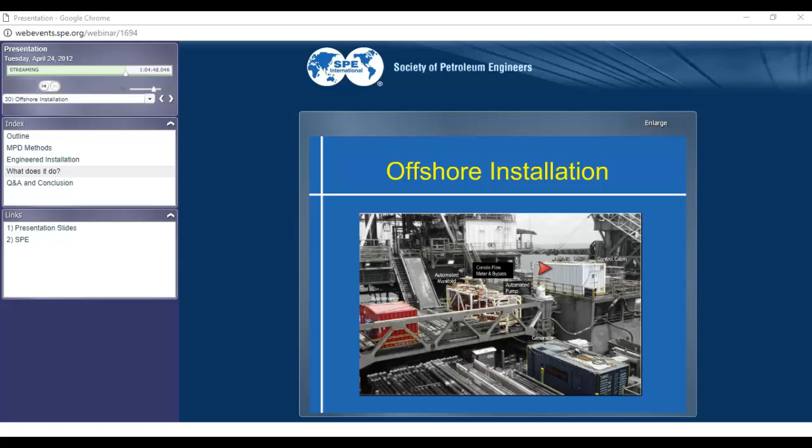I think that's what we're looking at here, where the static mud weight is below the pore pressure. Now, when we're doing managed pressure drilling with back pressure, we're not going to allow the well to just go to a static condition. We're going to apply back pressure when necessary, and the dynamic pressure, when the pumps are on, that friction can increase and remain above the pore pressure, so we're not going to invite an influx.

Essentially what we're doing is adding back pressure instead of mud weight to stay above the pore pressure, so we're not going to invite an influx. Thank you for the clarification.

Somebody kicks your cable or does something, or your hydraulics were to fail. I think the reliability's likely up over 99.9%. We haven't had a failure that way.